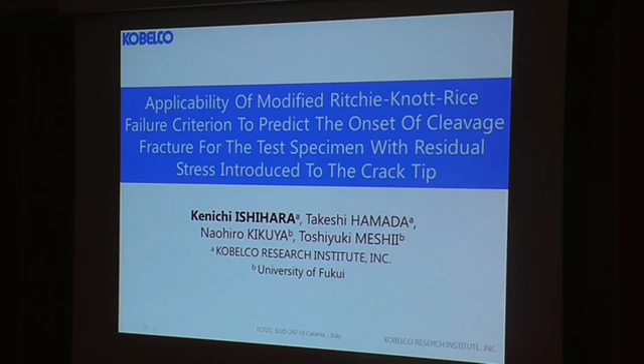Fracture toughness has been known to increase apparently by preload at high temperature regions, higher than the cleavage fracture temperature region. This is called the warm pre-stressing effect.

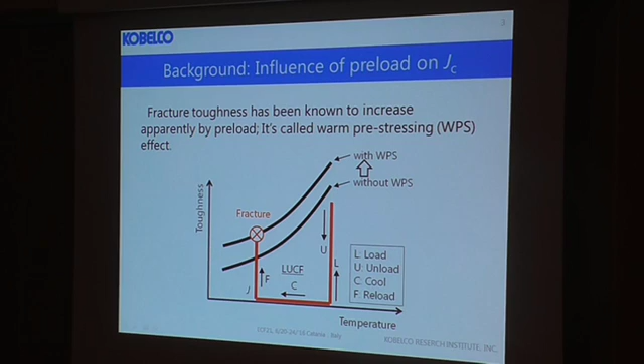Conventionally, the global approach had been used to evaluate the influence of preload. On the other hand, the local approach has been used recently, and Weibull stress is one of the widely accepted methods.

However, recent research suggests that the Weibull stress approach is not without its limitations. For example, recent research has reported that the Weibull parameter varies with size and temperature, and calibrating Weibull stress requires many specimens.

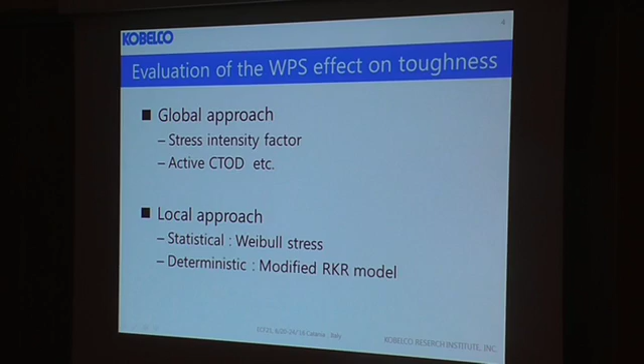We first sought to re-examine Chen et al.'s opinion that it is necessary to distinguish the concepts of the minimum toughness, or the lower boundary of toughness value, from that of the scatter band of toughness. The former is a definite parameter determined by specimen geometry and yielding properties, and the latter is statistical behavior determined by the distribution of the weakest constituent.

We interpreted Chen's opinion as meaning that a minimum JC can be reproduced by running an elastic-plastic finite element analysis, EPFEA, with a given stress-strain curve and a failure criterion.

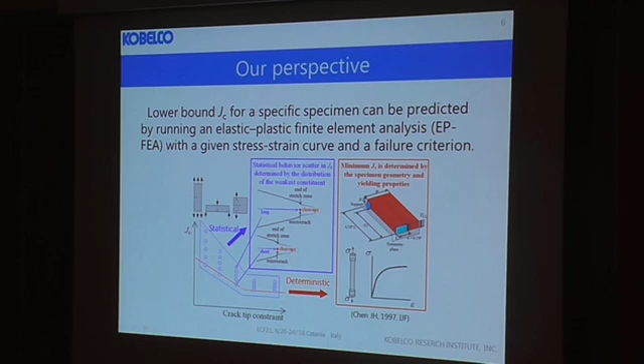For the failure criterion, we consider a modified Ritchie-Knott-Rice (RKR) failure criterion, that is, a 4-delta-T sigma-22-C criterion, which predicts the onset of cleavage fracture when the crack opening stress sigma-22, measured at a distance from the crack tip equal to 4 times the crack tip opening displacement CTOD delta-T, hereinafter denoted as sigma-22D, exceeds a critical value sigma-22C.

This criterion was validated as explaining the crack depth dependence on JC by Dodds et al., and the test specimen thickness effect on JC by Meshii.

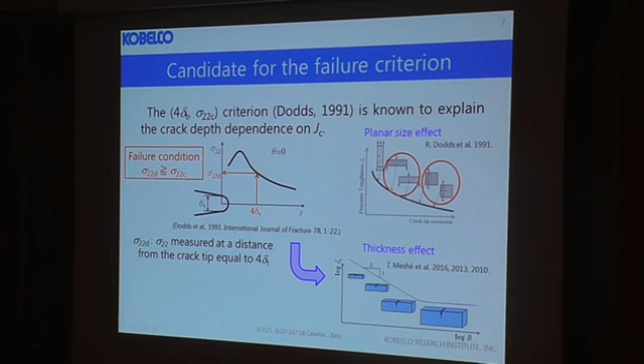Through examination of the applicability of the 4-delta-T sigma-22-C criterion to decommissioned RPV steel JC database, with specimen thickness ranging from 8 to 254 millimeters, Meshii showed that although the variation of JC was very large, the variation of sigma-22-C was very small, approximately 4%.

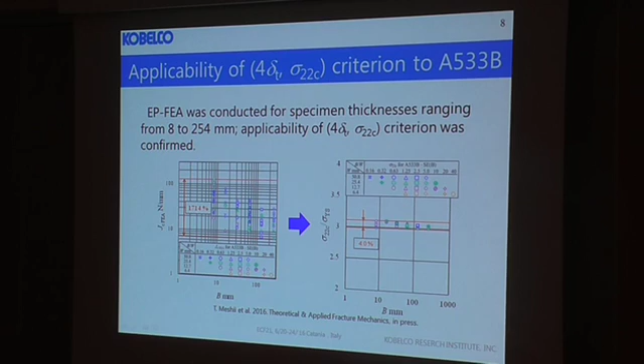Thus, we reached the idea that convergence of sigma-22-D for increasing load is necessary for fracture initiation, because the critical value sigma-22-C is equal to the converged value of sigma-22-D.

If so, sigma-22-D can be calculated by EPFEA with a given stress-strain curve without conducting a fracture toughness test. Thus, we thought that the JC of a specimen with residual stress might be predicted without JC data from tests with applied residual stress.

Also, we expected that a minimum J corresponding to sigma-22-D equals sigma-22-C, denoted as JS, would give an engineering prediction of the lower bound of fracture toughness.

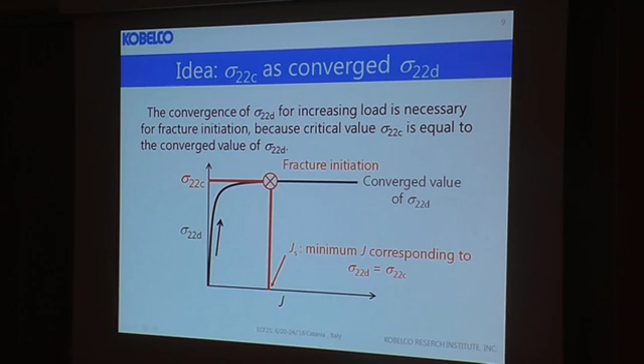This study is intended to examine the validity of the method for predicting JS, corresponding to sigma-22-D equals sigma-22-C, for a specimen with residual stress by preload.

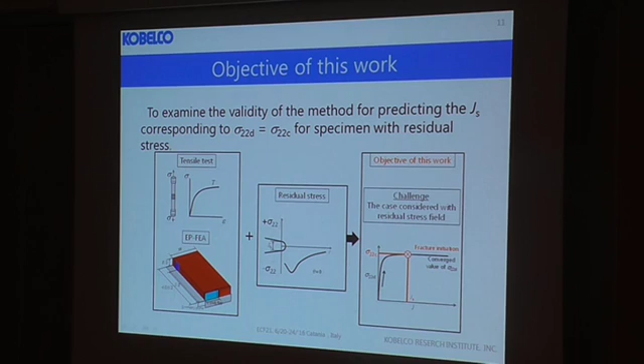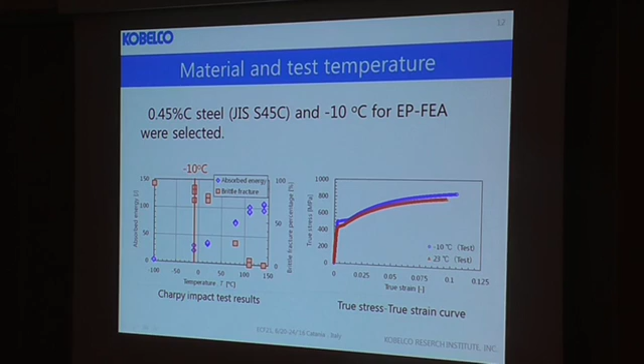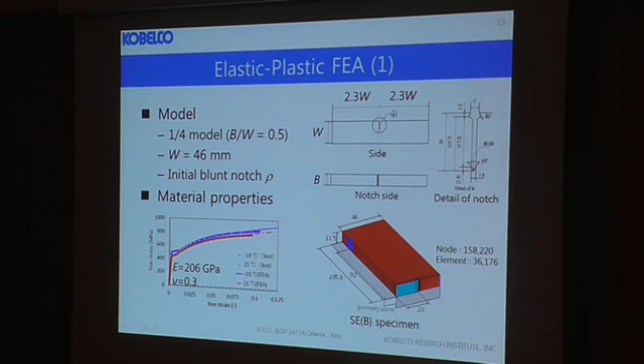First, preload was increased to 33 kN at room temperature. Then, after preload was unloaded, the temperature was changed to minus 10 centigrade.

And then load was increased to the predicted value of fracture load. Material parameters used were the properties for the temperature applicable to each process.

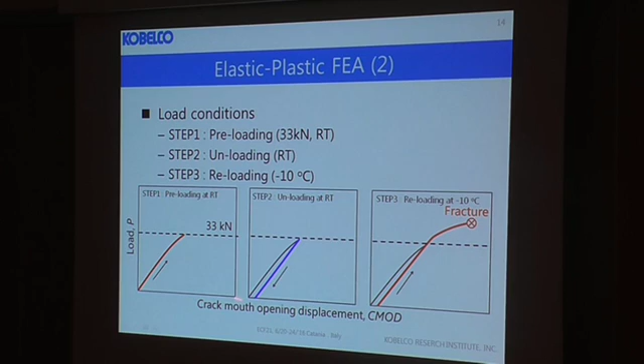Abaqus was used as the FEA solver. JFEA was evaluated using the relationship between load and crack mouth opening displacement, based on ASTM E1921. The CTOD was calculated by means of the 90-degree intercept method.

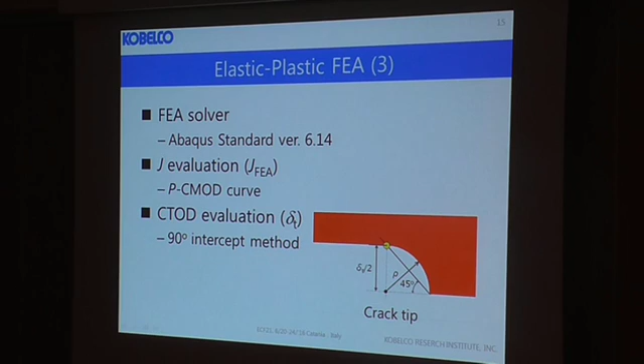Since it is necessary to determine the converged value of sigma-22d to predict JS, but there is no definite method to determine this converged value, here we applied the following method.

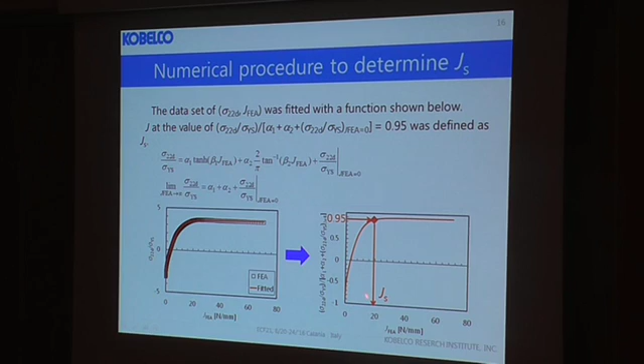The relationship between sigma-22d and JFEA is shown in this figure. Here, sigma-22d showed a converging tendency for increasing JFEA, as expected.

By using the method for predicting JS, the value of JS was predicted to be 18.9 Newton per millimeter.

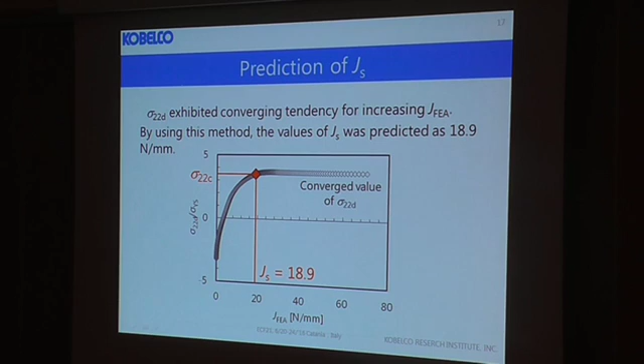Next, we performed the fracture toughness test to examine the validity of this method. First, a fatigue pre-crack of length 2 mm was inserted into the specimen at room temperature. Then, after the residual stress was introduced to the crack tip in the same way as EPFEA, the temperature was changed to minus 10 centigrade.

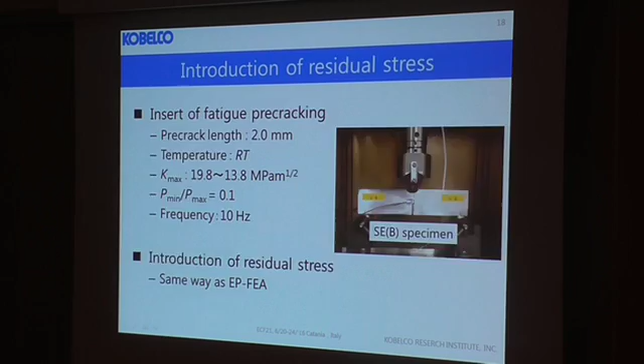Thus, it was concluded that the modified RKR failure criterion is applicable to SEB specimens with residual stress. In addition, the validity of the method for predicting JS was confirmed.

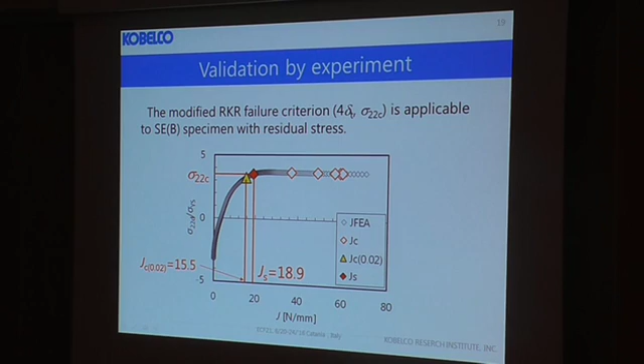The success in the current work indicates that the JS for a given specimen and temperature can be predicted with the stress-strain curve, and the fracture toughness test without residual stress may not always be necessary to predict the JS.

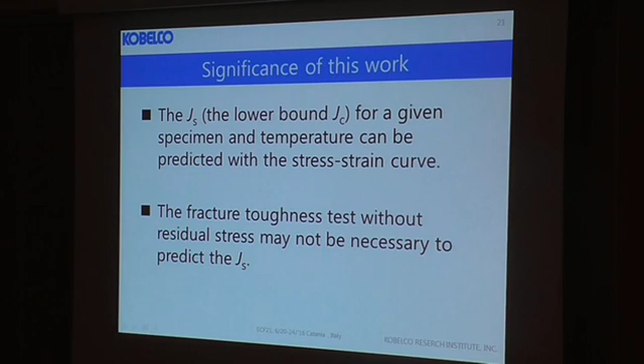The conclusions of my talk are summarized as shown here. Thank you for your close attention.